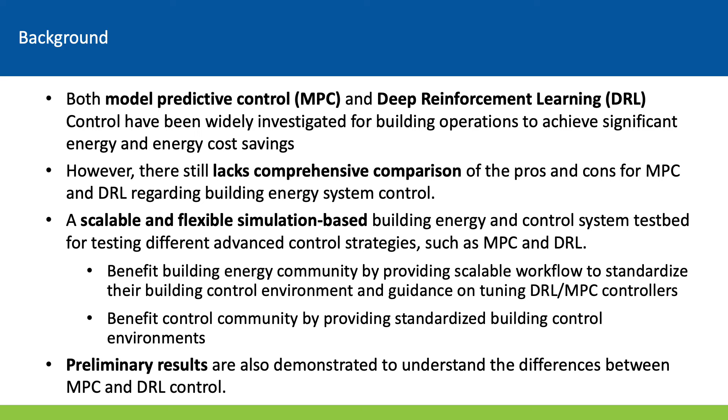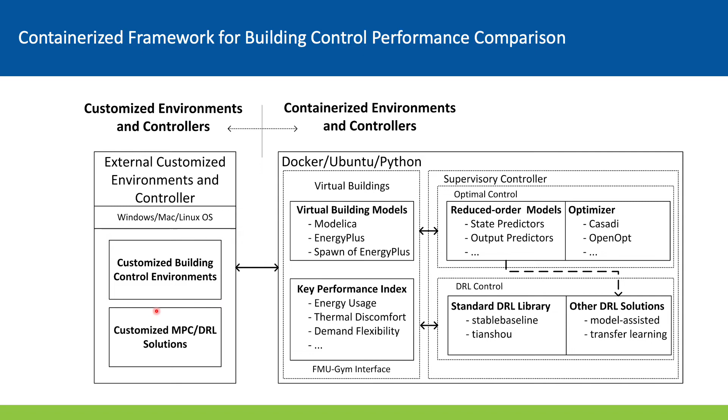And this whole framework can also be used by users on any operating system. They can customize their own building control environments, and they can also customize the MPC and DRL solutions that are then connected with this framework.

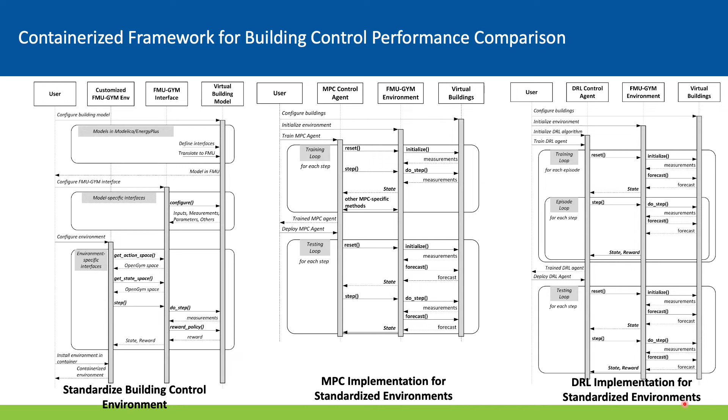There are three major functions for this framework. One is users can standardize their own building control environment by calling some of these key methods in the framework. They can also implement the MPC for the standardized environment, and they can implement the DRL for the standardized environment inside of these containers.

One preliminary case study for this framework is a simple fan coil unit system we considered for a single zone. The system relies on a simple control logic to maintain the zone air temperature, which is to control the fan speed. The objective of this environment is to minimize the energy cost while maintaining comfort level.

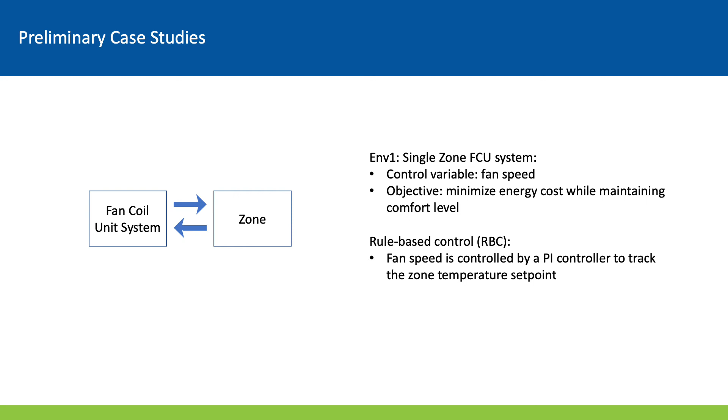The rule-based control serves as a baseline control. The fan speed is controlled by a PI controller so that the zone temperature could be tracked at its set point. The MPC formulation for this sample environment is shown on the left side. The purpose is that we're trying to minimize the energy cost in this term, and also we're trying to minimize the thermal discomfort.

The MPC relies on two models. One is the zone temperature dynamics model, represented as an ARX model, and also a power model in the format of polynomial equations. These models are identified using the training data, and we can get some model performance. For example, the zone air temperature prediction is within 3.2% error, and the NRMSE for the power predictor is within 10%.

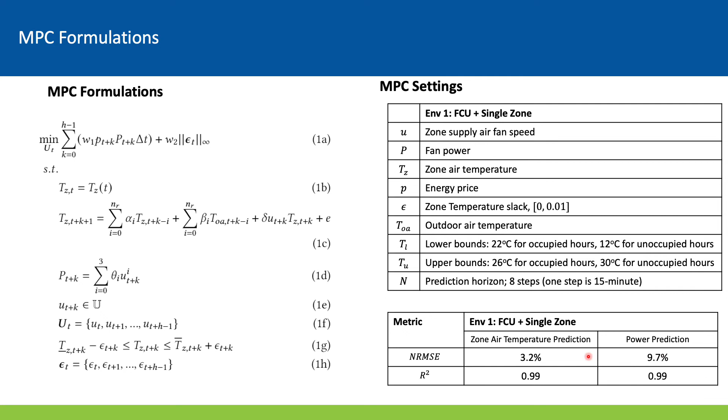For the DRL formulation, we introduced this state for this environment: time, zone air temperature, outdoor air temperature, solar radiation, the power at current time, three outdoor air temperature predictions for the next time steps, and three solar radiation predictions for the next three steps. The reward formulation of the DRL is exactly the same as the MPC, except that it has a negative sign.

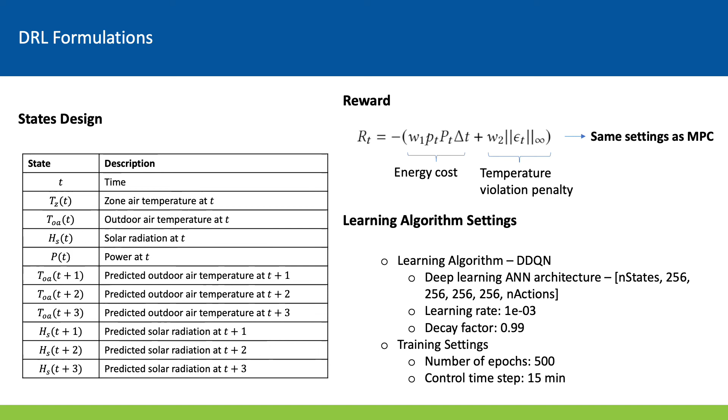For this learning algorithm, we choose the double DQN with 4 layers of ANN. For the training set, we choose 500 epochs, and the control time step is 15 minutes, the same as the MPC. So some preliminary results for this comparison, we can see from this figure.

The solid blue line is the RBC, and the dashed line is the MPC. MPC outperforms the baseline in terms of the reward definition. The DRL algorithm learns good rewards after a few iterations, starts to be better than the baseline controller, then starts to approach the performance of MPC, and eventually exceeds the performance of MPC after a long training time.

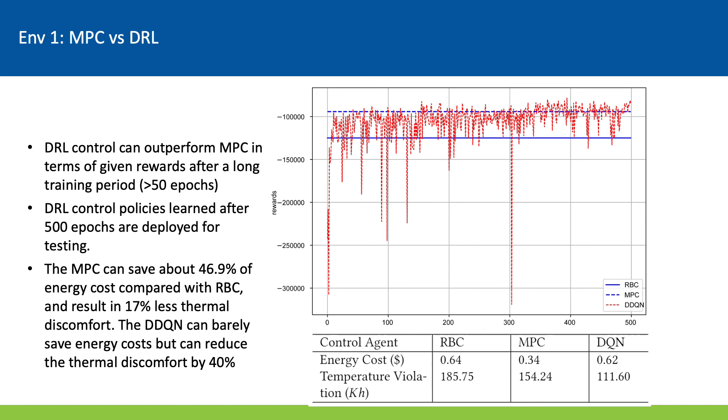So the conclusion is we provide a containerized testbed for standardizing building control environments. We also provide a preliminary test on the single zone system, and we found that both controllers require significant time to tune. In the future, we're going to test this framework on more complex building systems and provide more guidance on tuning MPC and DRL.